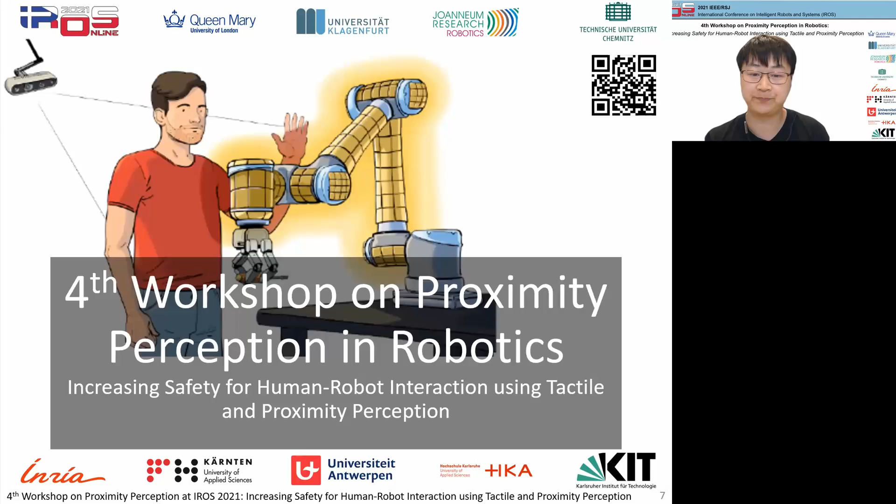Today we will host the last session of our workshop. This is the fourth workshop on proximity perception in robotics, and this year's topic is increasing safety for human-robot interaction using tactile and proximity perception. The idea this year is also to provide a bridging towards industry.

In our extra session we have 3 speakers, of which 2 are invited speakers and 1 is part of the PhD forum. First of all, today we have Dr. Peter Heiligensetzer from MRK-Systeme, then Francesca Palermo from Queen Mary University of London, and then Professor Rebecca Kramer-Bottiglio.

Today I'm happy to introduce our first speaker, Dr. Peter Heiligensetzer. He finished his PhD in robotics at Karlsruhe University, Karlsruhe Institute of Technology, about tactile and capacitive proximity sensors. He also worked at KUKA and later founded the company MRK-Systeme, which focuses on technologies regarding human-robot collaboration, as the name also says. MRK-Systeme offers many interesting and advanced solutions for industry applications with close human-robot interaction and physical contact with humans and robots, for example hand guidance based on force controls to increase the intuitiveness of the teaching processes.

They also offer a tactile and proximity sensing skin that covers the surface of industrial robots to enable human-robot interaction functionality. He's also founder of the company German Bionic Systems, which develops and produces exoskeletons for industry use cases. With that background and experience ranging from research all the way up to the deployment of industrial applications, we're very pleased to hear about your presentation. So Dr. Heiligensetzer, thanks for joining today, and you can now start your presentation.

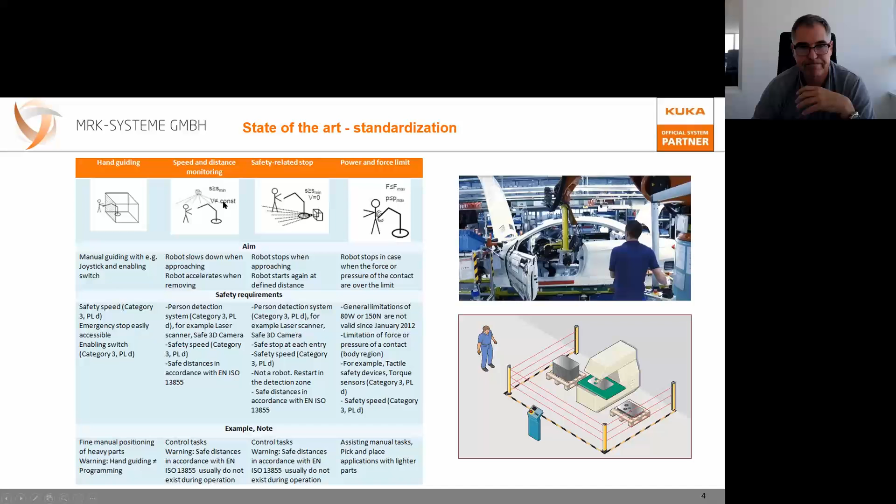Maybe also something from the real industrial world. There's the robot standard, ISO 10218, and it has two sections. One section defines the naked robot itself that you want to use.

In that part of the standard, it's defined that the collaborative robot should have safe brakes, axis limitation, reduced speed, and maybe force or pressure limitation. So these are the basic technologies the naked robot should provide.

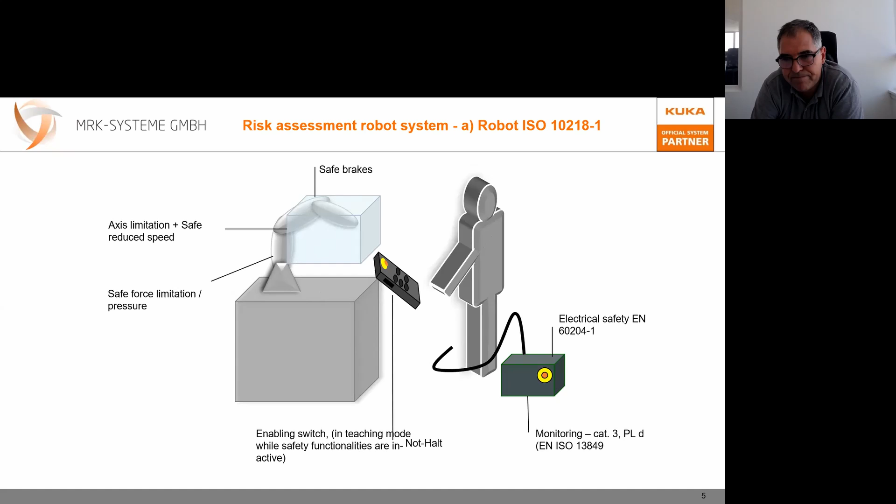That's one side. The other side, which I'd say is even more important, is a standard for system integrators defining the robot application. Because a robot cell is not safe on its own—an integrator or someone knowledgeable has to parameterize the robot.

For example, if the robot has the ability to reduce speed, someone should parameterize it correctly and also carry out testing and validation. Likewise for the criterion of power, force, or pressure limitations, somebody has to do the measurements. They have to follow a certain procedure, and it has to be recorded.

So there's a lot of work to be done around the robot. You cannot just put the robot on the table and let it run. You have to do quite a bit of parameterization work.

Then finally, at least in Europe, you put a CE mark on a type plate on the robot cell, and you give an EC declaration of conformity, where you declare that the machine is safe. This is an important step, and actually this is our core knowledge—using collaborative robots to make a safe robot cell out of them.

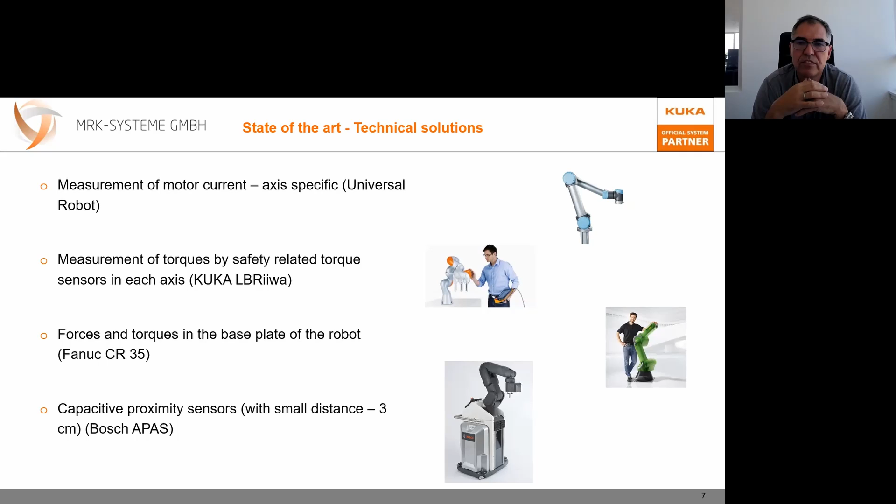So that's a rough overview about the collaborating robots.

When we started in this technology, we also used Universal Robot and others, but I'm still very much in favor of this proximity sensing, not to have physical contact, but to stop before a contact occurs.

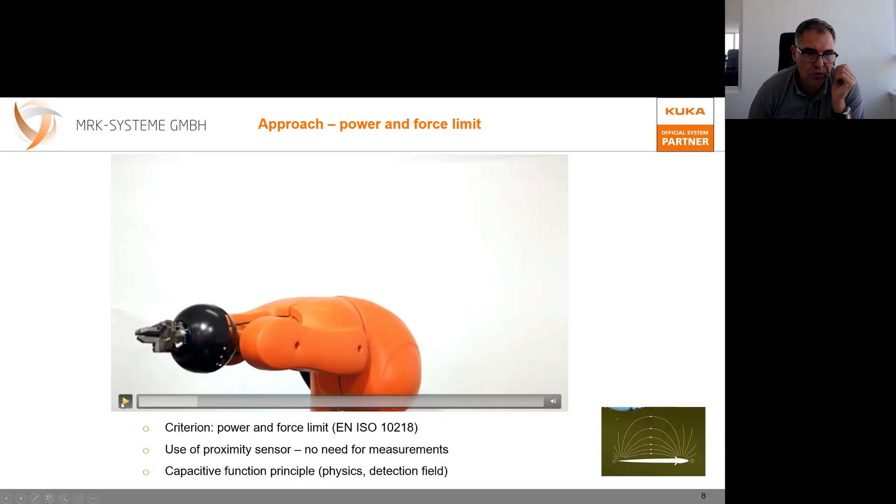So here's a short video in general of how it looks like. This is the robot, and it has sensors inside, and if somebody approaches, the robot gives a reaction and stops.

As mentioned before, in the standard ISO 10218, there are a couple of criteria that can be fulfilled to enable such safe human-robot collaboration. And even though we have proximity sensing, we still argue within this power and force limiting category. But just to be clear, we don't want to have any force at all. So we stop 1 millimeter before the actual contact, using the same argumentation and same criterion of the standard, but with no force and no problems in measurements.

So, some technical details about our measurement principle. Capacitive sensors are a fairly old technology. The background is it's a capacitor with, in general, 2 plates. The system we are using uses 3 plates: there's an excitation electrode, there's the ground, the surrounding ground, and they create an electrical field. We have an additional measuring electrode where we get the measuring signal from.

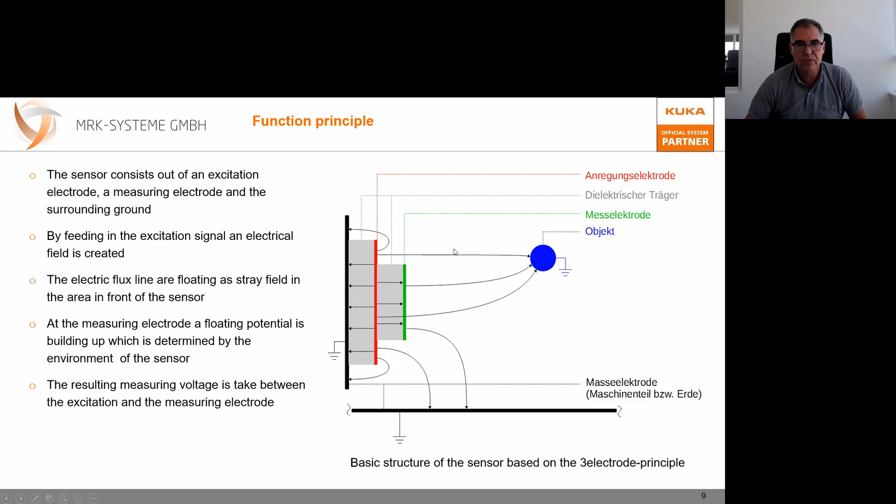So we define a threshold, and at this threshold we define that an approach is occurring. Since it's the real world and there's also ground close by, the basic sensor voltage is never zero—it settles at a certain value, and at the beginning of the measurement we take this as a reference, so our calculated values are just the difference from there.

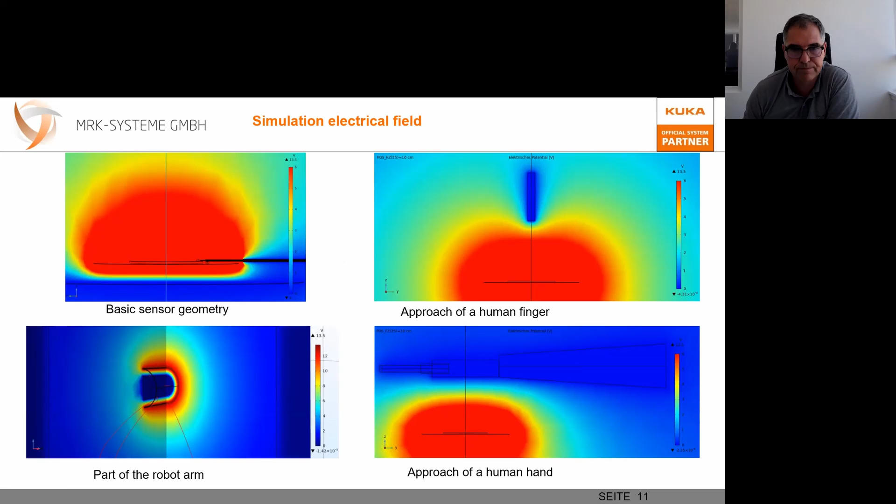So this basic technology we've been working on for a couple of years now. When coming to a product or using it for safety related issues, we put a lot of effort into optimizing the EMC characteristics.

Of course, by definition, a capacitive sensor creates a field and has some EMC behavior, but also in a certain range. There are standards defining in what frequency and strength EMC signals are allowed and what not. So in this band, we have to optimize our exciting electrode.

Also, we are using microcontrollers. Actually, we're using 2 microcontrollers that do a cross calculation and check each other to see if the calculations are still correct. And also, the creation of this excitation field is done by these microcontrollers.

What we also found out in our testing is that temperature is also a strong influence we have to take care of. So we make the whole circuit as temperature stable as possible, but we're also using an active compensation algorithm. We have sensors on our board and also on the electrodes, and a certain algorithm that compensates temperature-caused drifting effects.

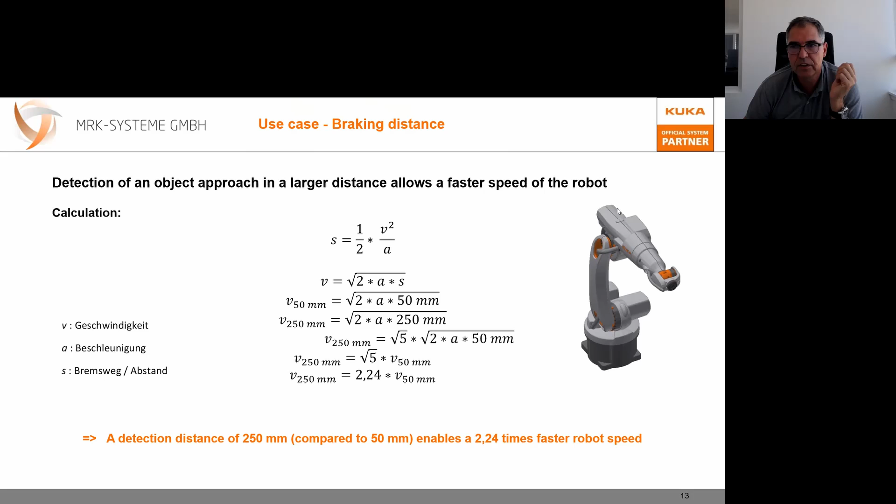So for real use cases, one example is at Audi—probably you know, a German car manufacturer, a nice one.

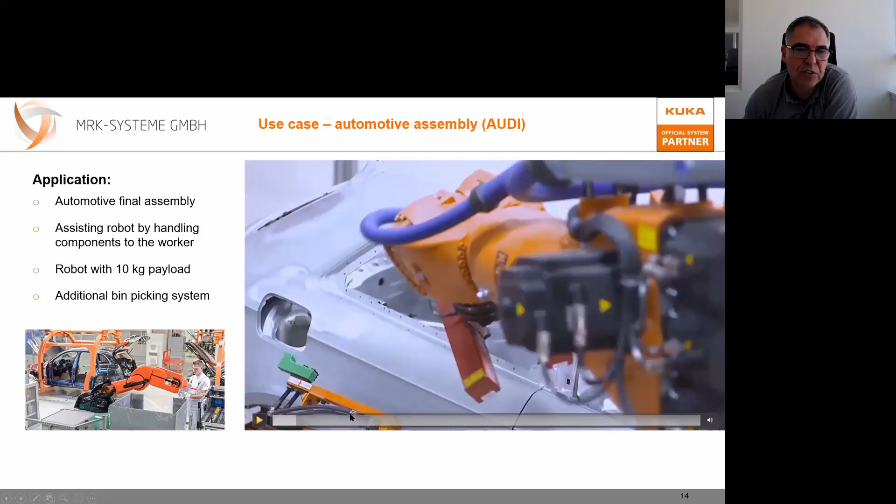Can you hear the sound? Yes, we can hear it. Okay, so yeah, probably I'll just leave it, unfortunately it's in German, but it's a nice movie, so I think you get the impression.

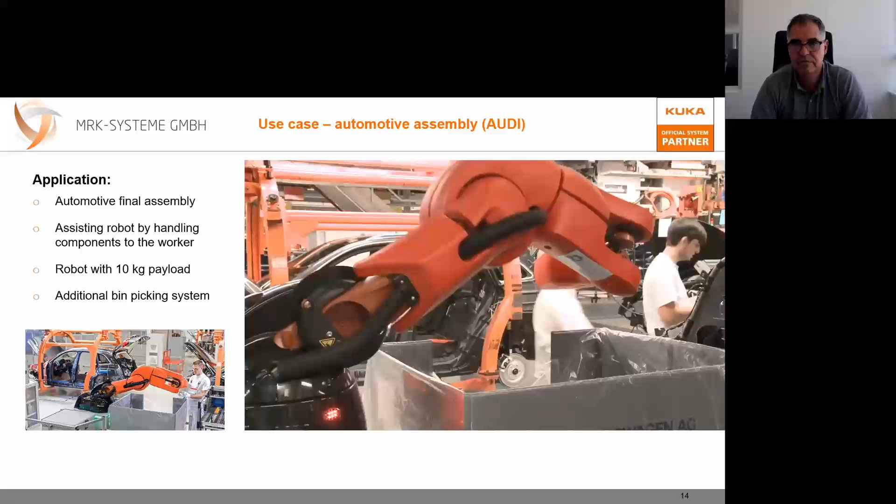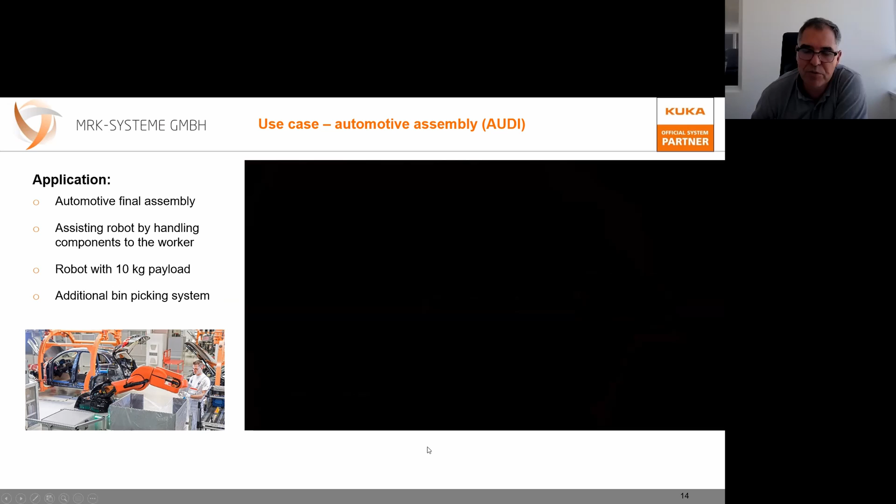Okay, so sorry, it was in German, but it was such a nice movie, and also with the speech of the Audi guys, if you could understand it, was very interesting.

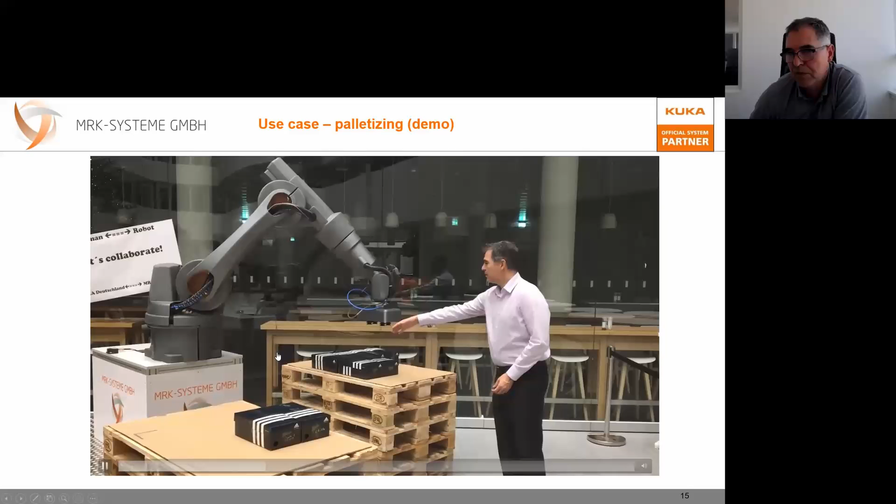So other applications, here we see we also use it for palletizing applications. There we also have in the tool area the sensor, also very nice, but this was not in a real application, this was in a demo application. In general, robots that are stopping before hitting something is, I would say, always interesting.

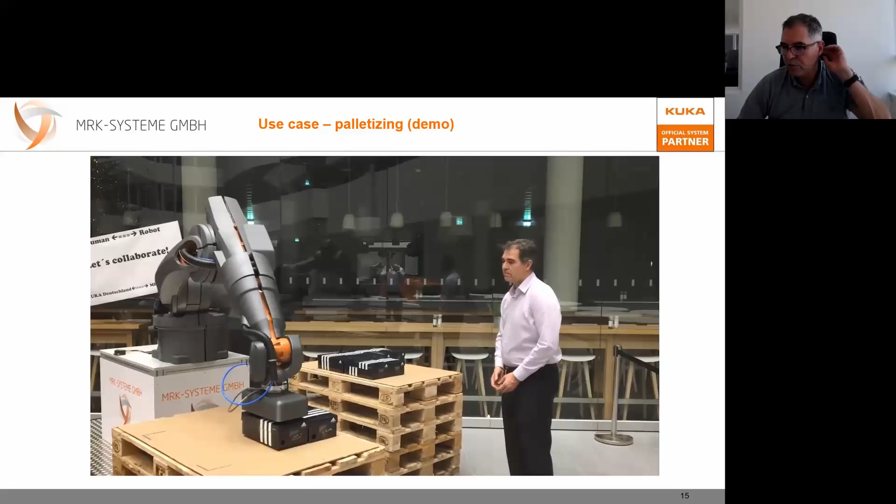Good, yeah, so coming slowly to an end of my presentation. Some summaries and some additional thoughts. In general, as I mentioned before, this human-robot collaboration with cobots, with power and force limitation and small robots, is a very interesting way of acting together with a robot, but it's not the only one.

So also speaking in the real world, if you have the possibility to use a laser scanner, then probably you should use it, because it's a stable technology. You don't have to do measurements with the collisions and so on, and it's very nice. But of course, this power and force limitation, as we have it with the other cobots, is very interesting because you can come close to the robot.

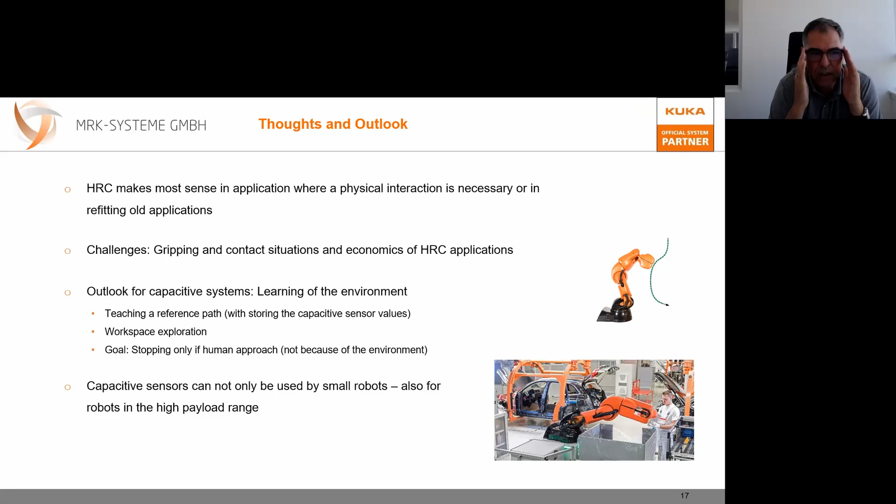Good. So some additional thoughts. Human-robot collaboration is not always the best choice. Even if it's my personal thing, if I see I could do an application without human-robot collaboration, just using fences, I would do so, because normally it's always easier and always cheaper. But there is a niche, and it makes sense when there's not much space, like automotive final assembly, or if you have to refit old applications where already humans are involved, then it makes perfect sense.

The challenges in this human-robot collaboration is always the gripping in the contact situation, because when you have the hand in between and the robot is coming, then this is always a problem. And also the economics, because standard robots are fairly cheap, and if you have to do a lot of engineering and a lot of thoughts about safety, the cost for such an application goes up, and then it might make no sense to use the robot anymore.

For the capacitive system, what is very nice, so the future could be that we also take into account the environment, because at the moment, if you have a dumb sensor, it cannot decide if there's a human standing, or if there's just a car standing, or something from the environment. But if you can learn the environment by teaching maybe a reference path, or you do a workspace exploration, then the sensor or the robot system can decide if it's human or if it belongs just to the environment, and then it makes it easier also for the tool area to have a protection.

Also, what is nice with the capacitive sensor, it's not only limited to small robots. For example, when thinking about the Fanuc CR35, because it's so big and so heavy, it has a certain stopping distance, it has to move so slow. But if such a robot can be equipped with proximity sensors, the speed might be higher. It might not be extremely high, but higher and reasonable for real applications. And so also this human-robot collaboration can be used for robots in a higher payload range.

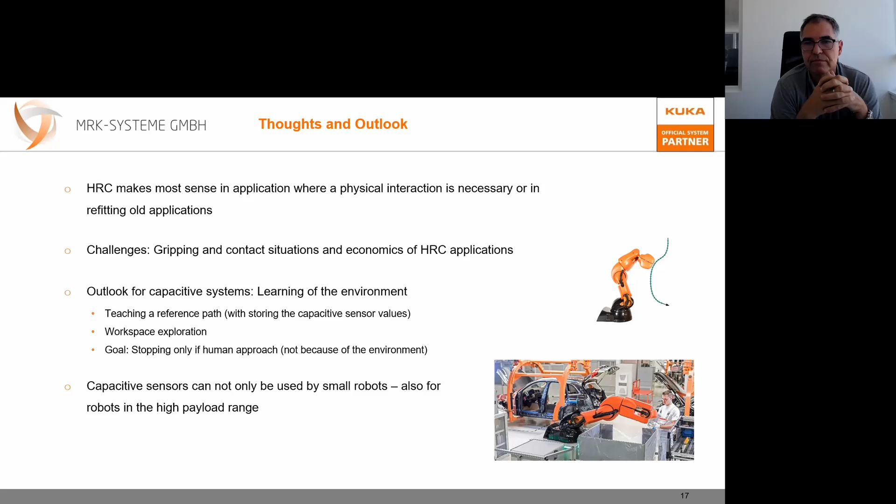Good. So far to my presentation. I hope you got something from it, and yeah, I'm ready for feedback or questions.

Right. Thank you very much. Thank you for a nice presentation, and also for giving us the insights on the development of the sensors and the certification process. So usually as a researcher, you usually just don't deal with safety certification or specifications, but at least not that intensively, and that's a nice

perspective for us. Does anybody have questions? Yes, Stefan? I have a question. Yeah, thank you, Peter, for your presentation. It's very interesting.

I wonder about the value proposition of this type of technology, and I'm curious also in making the difference between fenceless automation, meaning automation that's happening with robot sharing a common space with the human, but not necessarily interacting to solve a task, versus human-robot collaboration, where the task is solved by the robot and the human interacting. So I thought, is fenceless automation maybe a more attractive value proposition than the actual collaboration between human and the robot?

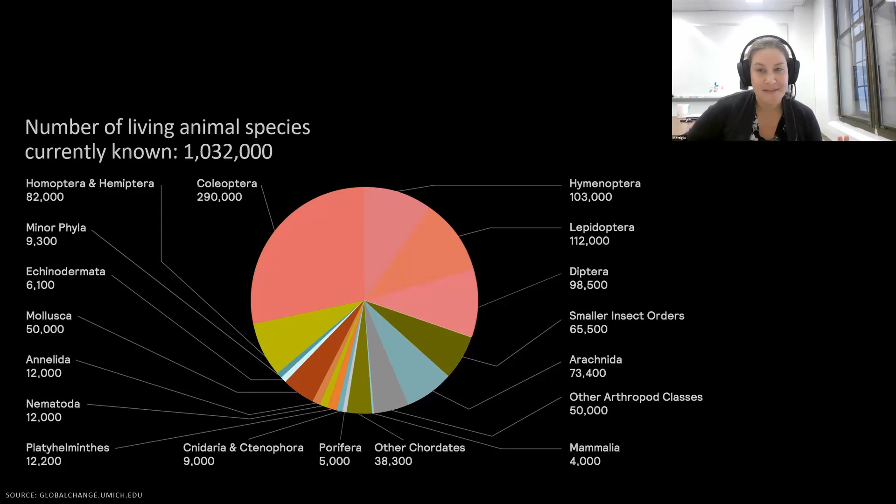Here's a plot of all the known animals in the world, just over 1 million at the time of this data. As it turns out, all known animals in the world are at least partially soft. There are no known animals that are completely rigid, which is in contrast to the way that we typically design machines and robots. And if you look even closer, over half of all animals known are completely soft. So there are some caveats here - completely soft animals need to be supported by their environment, so you think of jellyfish that live in the water or worms that live in the ground. We as humans are a fairly large animal, and we require our skeletal structure to keep us standing up on the ground, but even we are only 15% bone and 85% soft and fluid materials. So maybe there's something here - is it possible that our soft material composition actually plays a role in our ability to interact with and adapt to our environment?

This is a question that I am thinking about, and that many people are thinking about. Soft robotics in general, this approach of using soft materials in robots, is becoming really, really common in the academic community. There's many soft roboticists - it's a rapidly growing field, and there's many benefits to soft robots. So here's just a few soft robots that I think showcase these benefits very well.

But all of these robots, and most robots, are very task specific. They're designed to perform a very specific task, and they don't lend well to tasks outside of that designed use case. So locomoting robots often don't perform well as wearables or as grippers, and so on.

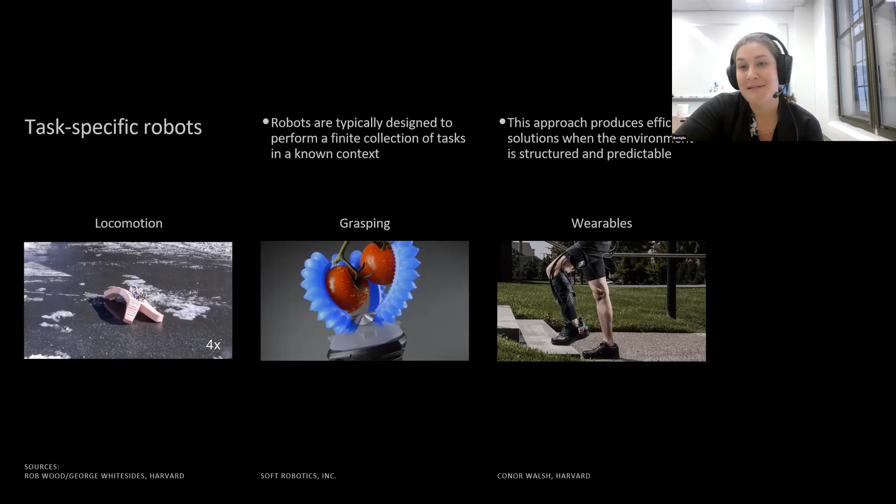And so this is the question that I'm really interested in. Can we design more adaptive robots? This is kind of the central focus of my group right now. We're working at the interface of materials, manufacturing, and robotics, trying to use new materials and incorporate them into robot constructs in order to achieve this new function of adaptive morphology and behavioral control policy.

So we have a few different adaptive robot platforms: robotic skins, robotic fabrics, a robot with morphing limbs for amphibious locomotion in two different environments. I won't talk about all of them today due to time limitations.

I will mention—I'm not going to talk about our robotic skins, but just so you know, following Peter's talk, he talked a lot about capacitive sensors, so we've also incorporated capacitive sensors for all of the reasons and benefits that he described. I think it's fitting that I omitted that from my talk today, but I'm going to focus on robotic fabrics and morphing limbs. So diving right in, we'll get into robotic fabrics.

Okay, what is a robotic fabric? I think definitions are always variable between people. Here, we describe a robotic fabric as simply a fabric that has been roboticized. Fabrics are incredibly ubiquitous—I'm wearing fabrics, my chair is fabric, my backpack is fabric, you are also probably wearing fabrics. They're just all around us. And the idea of actually roboticizing, or implementing some functionality into these inert, typically passive materials, is really appealing.

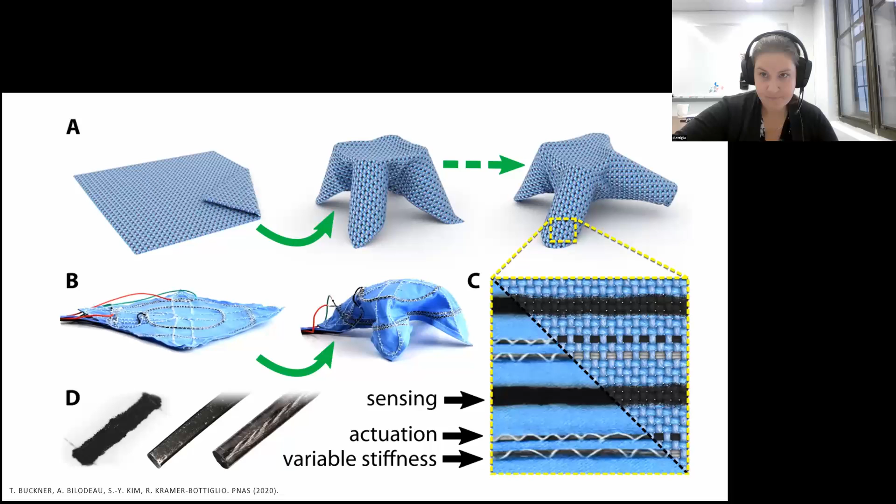So what we did is we created a suite of functional fibers to achieve actuation, sensing, and variable stiffness, and incorporated those into fabrics. I'll get into this suite of three different functional fibers in more detail, and I will focus on the sensing, given that this is a workshop on proximity sensing.

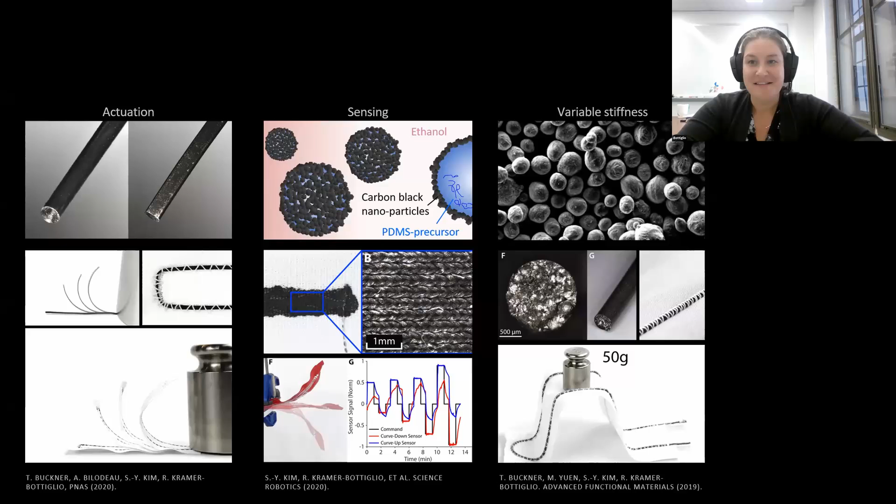Starting with the actuation, we use shape memory alloy—nitinol—typically made in round form, but we found that when we integrated antagonistic wire bending actuators into fabric, off-center forces can encourage the wire to twist rather than bend in its couching. Couching is what we use to attach it to the fabric, and this can cause chaotic actuation. We overcame this challenge by flattening the wire into these SMA nitinol ribbons as opposed to wires, which allows us to get this really clean bending actuation of the fabric.

Moving over to variable stiffness, we developed these variable stiffness fibers made from a composite of epoxy, which has a glass transition temperature—a thermoset epoxy—incorporated with Field's metal particles. Field's metal is an alloy of indium, bismuth, and tin, with a melting temperature around 62 degrees Celsius. This gives us a two-tiered softening effect.

When the material is cool, the epoxy is pretty rigid, with solid metal particles in it, so the whole thing takes on a very rigid composition. When we apply heat, the epoxy undergoes its glass transition temperature, softening by about an order of magnitude, but then the included metal particles also melt. So instead of rigid metal particles suspended, we have liquid particles suspended, and it undergoes an increased softening effect. We see almost a three order of magnitude change in stiffness between the cool state and the hot state.

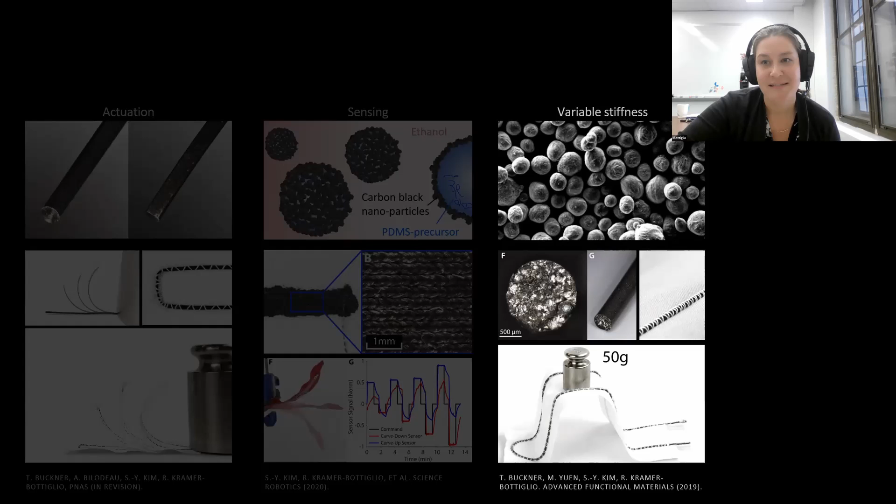And then finally, I will focus on the sensing element in our robotic fabrics. We developed this Pickering emulsion in order to incorporate sensing directly into textiles—this was a really clever idea put forward by one of my former postdocs, Dr.

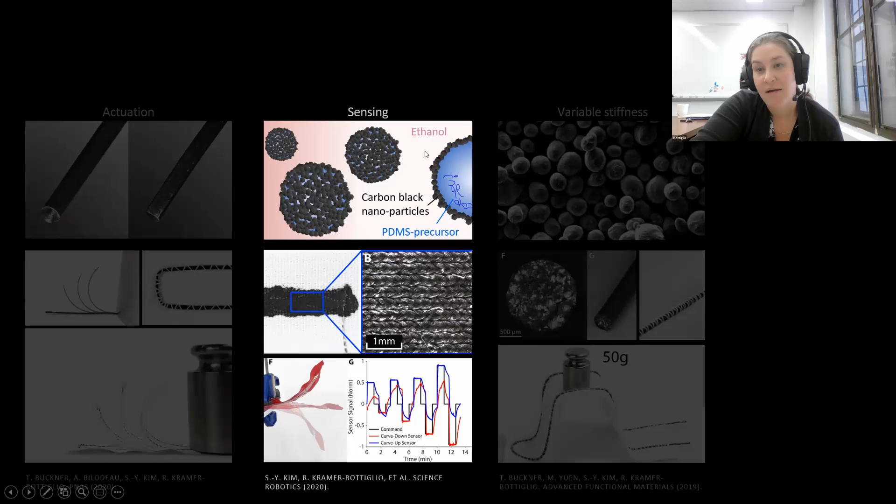Sang-Yup Kim's idea was to essentially take conductive composites and suspend them as an emulsion in a non-viscous carrier solvent. So what we have here in the schematic is a pre-cure silicone particle. This is PDMS, uncured, and it's stabilized by small carbon black nanoparticles on the surface. These are all suspended in ethanol, a very non-viscous, gentle solvent. When we deposit these on a surface, textile or non-textile, the ethanol evaporates away, and it allows these particles to start coalescing and self-assembling on the surface to create a conductive composite that can perform as either a resistive strain sensor or an electrode to a capacitive strain sensor.

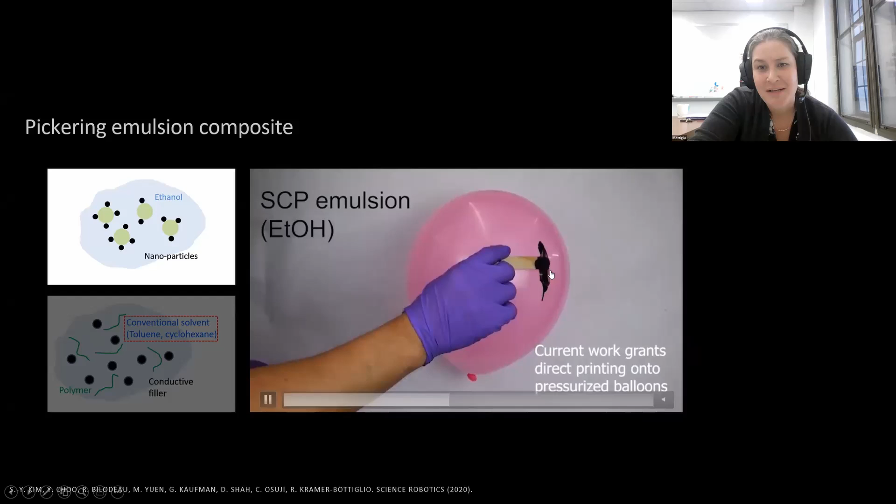So we can start to do some interesting things with these, looking at printing them onto substrates. Here you can see again we have these conductive composite particles suspended in ethanol. It's very gentle. We're putting it onto a balloon here, just kind of pasting it on. I'll pause this for a second just to focus on the stability and the printability of the ink.

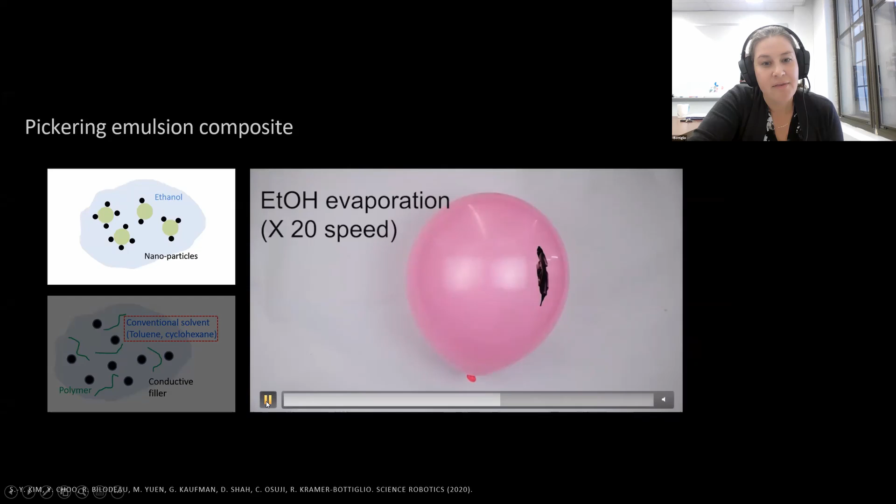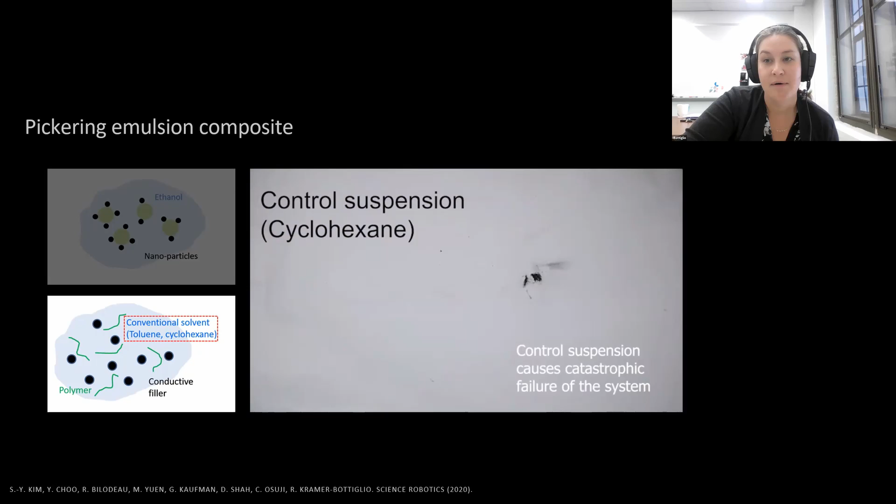And we contrast that with a typical conductive composite, which usually needs to be thinned. You would have a conductive composite and need to thin it out in order to print it, usually with a toxic solvent like cyclohexane or toluene. And then as you can see, when you put that onto a substrate, it will cause damage. So that can be challenging for wearability, putting it onto fabrics or any kind of elastomer or latex substrate.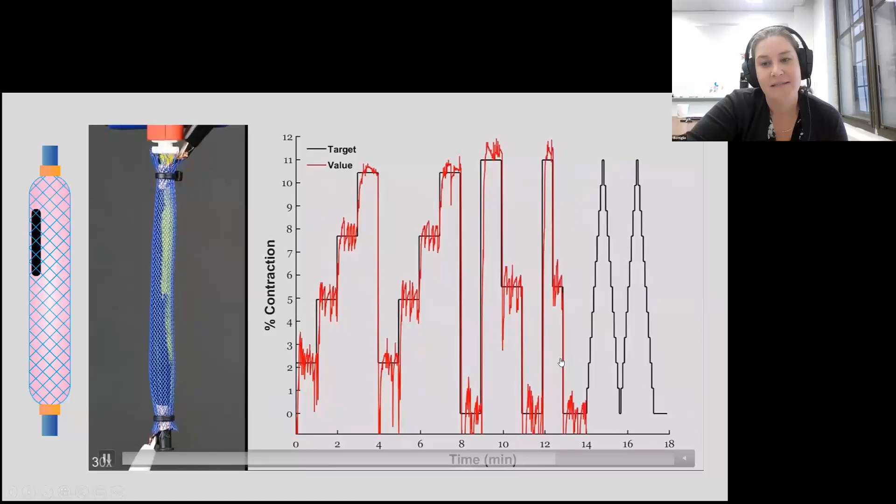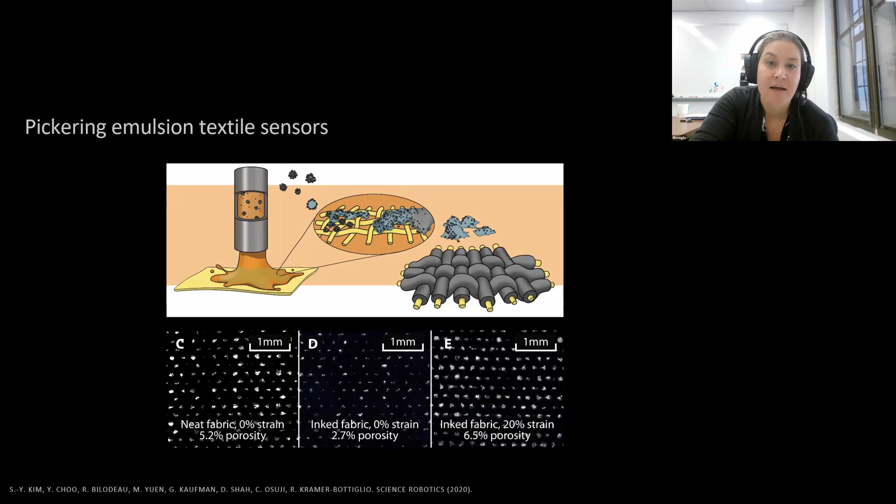Of special interest to robotic fabrics, as it turns out, we weren't quite expecting this, but when we print this onto a fabric substrate, the conductive composite self-assembles around the individual fibers as opposed to filling the gaps between them, which is what we would typically see with a more viscous or thin conductive composite. So we print this onto standard fabrics like cotton or muslin or nylon, and we can see this is the neat fabric backlit, with about 5% porosity. When we print our Pickering emulsion sensor onto it, we retain a lot of that porosity, about almost 3% porosity. And in the strained case we increase that porosity further. This is really important for retaining the properties of the fabric. If we want to use these, especially for wearables, we want to retain that porosity and breathability for comfort.

Here we painted the Pickering emulsion sensor onto kinesiology tape. This is a standard fabric tape that's used to usually support athletes without restricting their motions. And you can see the raw sensor data coming out of the sensor.

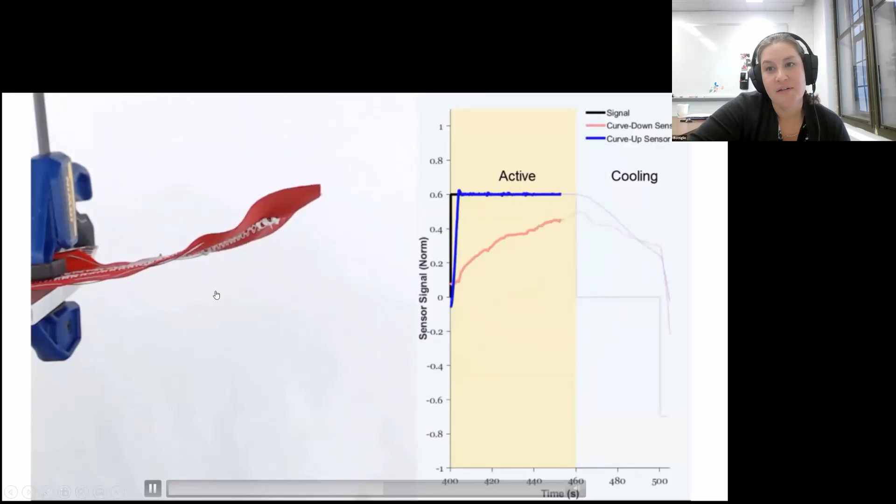And here the sensors are placed into a fully robotic fabric. We have our shape memory alloy ribbons incorporated into the fabric, and the fabric is being commanded to simply bend up and bend down. We have sensors, the Pickering emulsion sensors, printed onto the top side and the bottom side of the fabric, and they're being used to actually control that upward and downward motion. Although you can see it's a little bit jumpy.

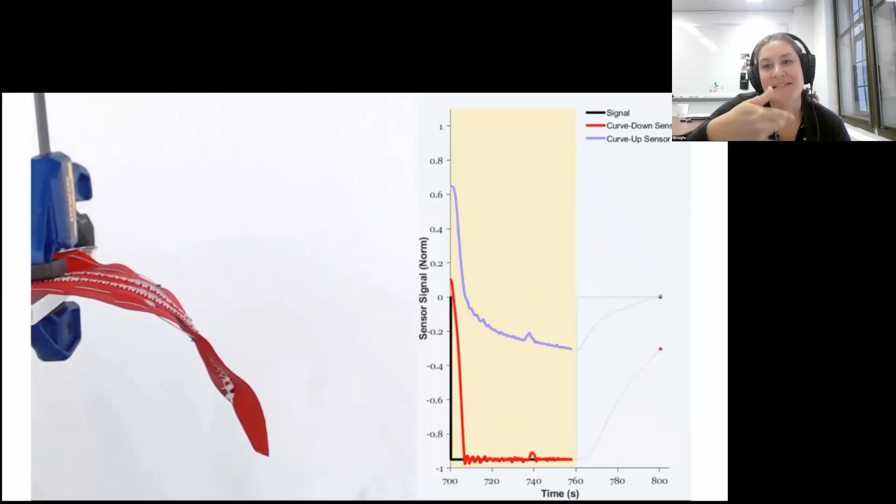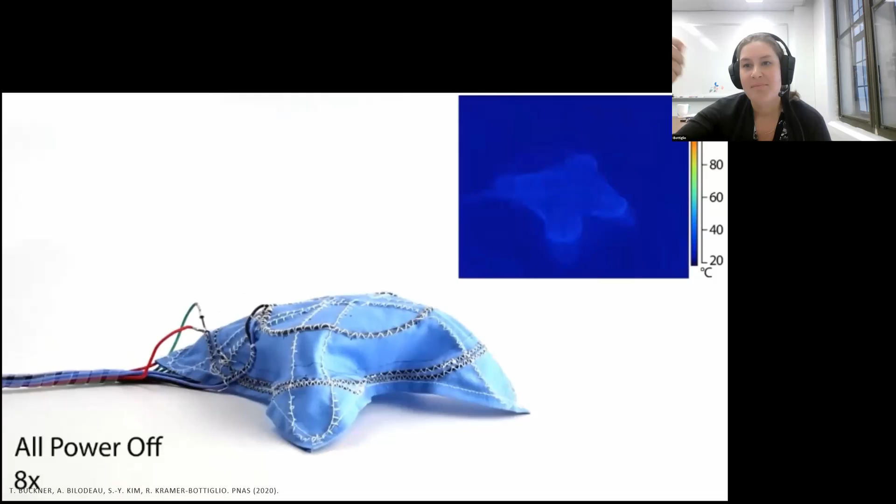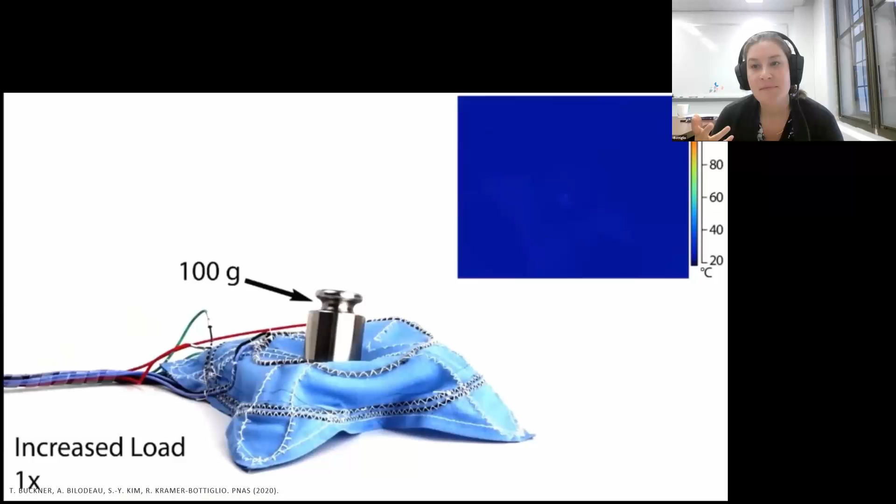So here are some full robotic fabric demonstrations, showing the shape-changing behavior and potentials for robotic fabrics. In this case, the fabric starts out in this flat configuration. It softens its variable stiffness frame and then uses its actuators to stand up into kind of a table-like structure. And then we place weights on top of the structure. In a moment, you'll see that we soften it again and the whole thing settles back down into its initial flat configuration. So I think this demonstration shows how we could potentially use these for self-deploying structures, things like deploying tents, and load-bearing systems. And we're working on the system now to make it actually dynamic into a walker that can carry loads.

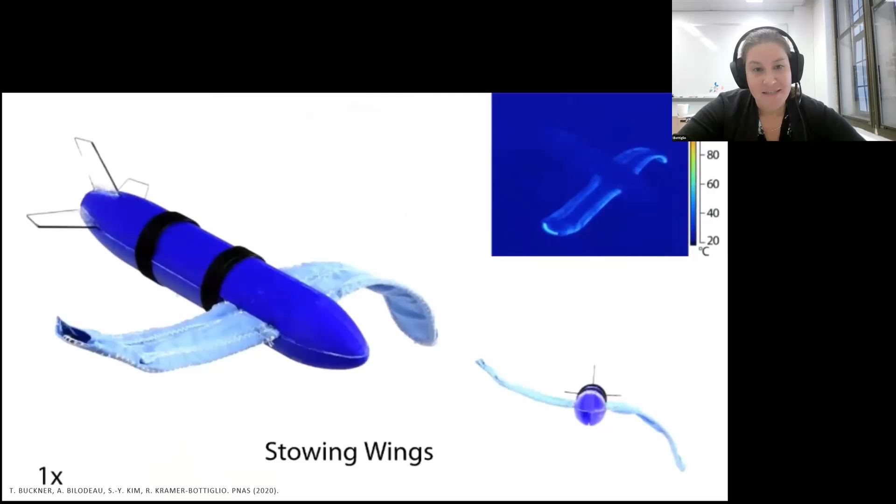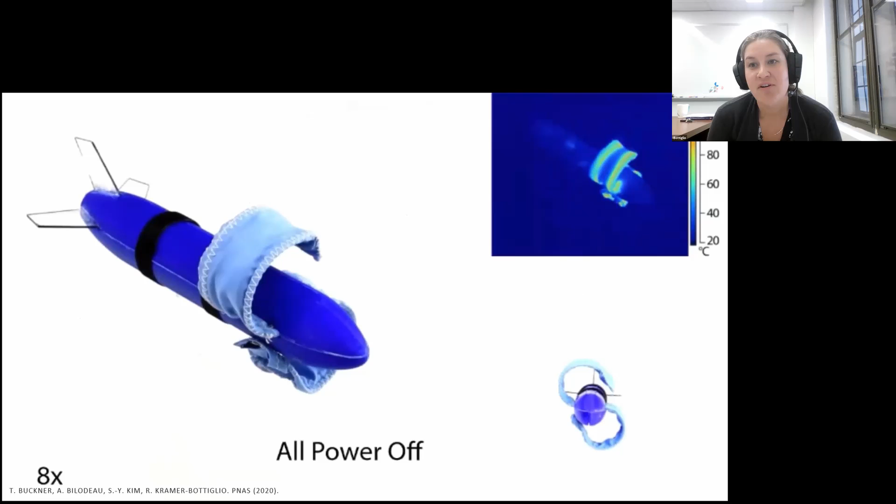Here's another demonstration of the robotic fabrics in action. We had these wings that are rigid initially. We soften the variable stiffness fibers, and the wings curl around the fuselage to take up very low volume during storage and transport.

They can then self-deploy and become rigid and load-bearing again to perform as a flyer. We don't actually show this flying, however the system is fully untethered. All the electronics, controllers, and batteries are inside the fuselage, so it's a fully untethered demonstration.

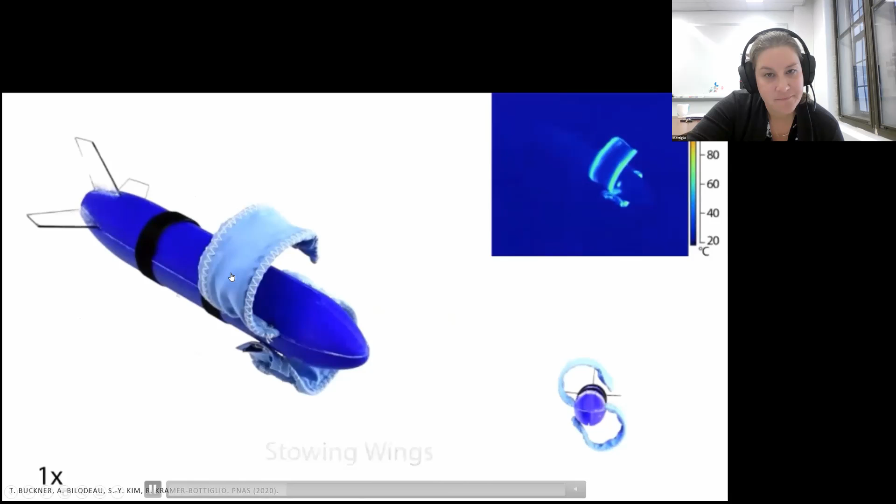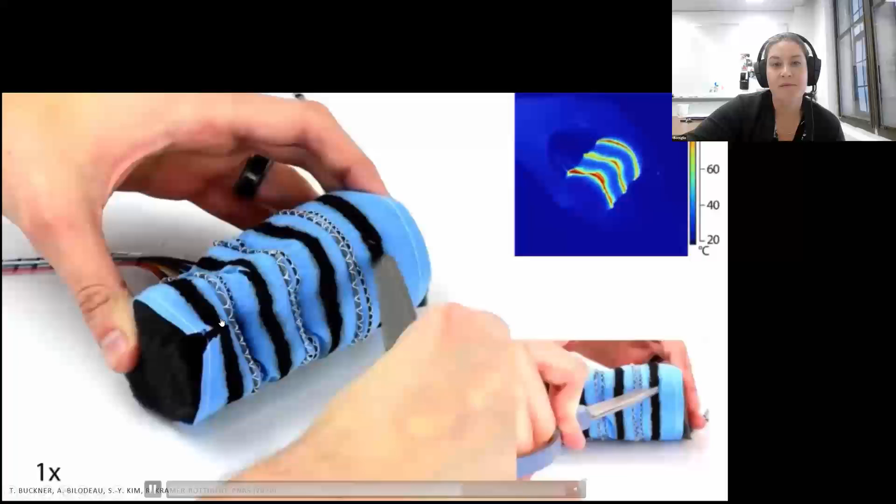Finally, to showcase potential wearability of robotic fabrics and the utility of the sensors, we have this reactive robotic tourniquet demonstration. This emulates the idea of damage: upon injury, the sensor might be cut, and the broken sensor triggers a reaction.

The variable stiffness fibers soften again, and the actuators compress to apply constrained blood flow through the limb, simulated here by this foam. Then the variable stiffness fibers become rigid again to hold that compressed position without any additional power supply.

I'm going to switch topics now away from robotic fabrics and the Pickering emulsion-based printable sensors, and talk about one more adaptive platform we're working on, which is a morphing limb platform for amphibious locomotion.

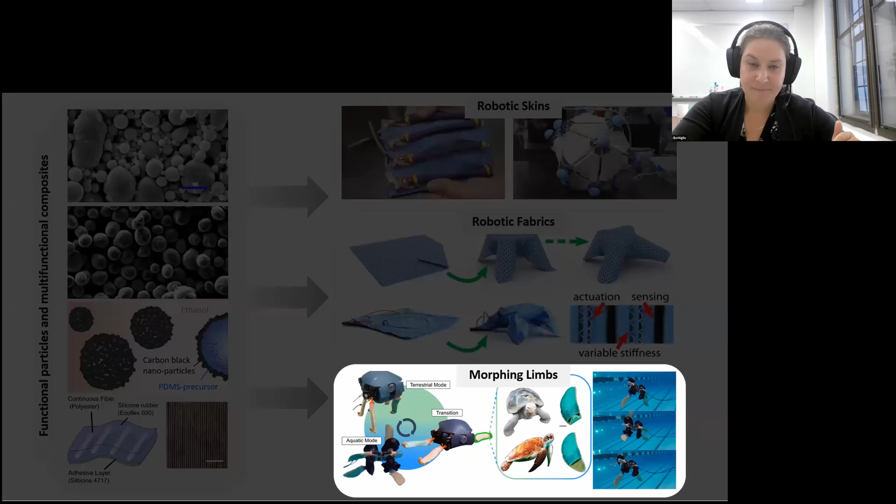The basic idea is we took inspiration from two morphologically similar animals, sea turtles and land tortoises, which share this common hull morphology but differ primarily in their limbs. Land tortoises have a rounded limb better for load bearing, while sea turtles have a flattened flipper better for hydrodynamic efficiency in water.

So we developed this soft robotic morphing limb. It uses similar materials and technology to the robotic fabrics we just saw, with fluidic actuators coupled to a thermoset epoxy. It starts initially in a neutral flipper configuration. You can see copper laser-cut heaters here. We apply heat, which softens the epoxy and makes the whole thing very soft.

We use our fluidic actuators to morph the limb into this rounded load-bearing configuration, and you can see the bottom of the limb curls forward to create a foot. Then we cool the whole system to lock the new shape in place, allowing us to transition between something that looks more like a flipper for swimming and more like a leg for walking on land.

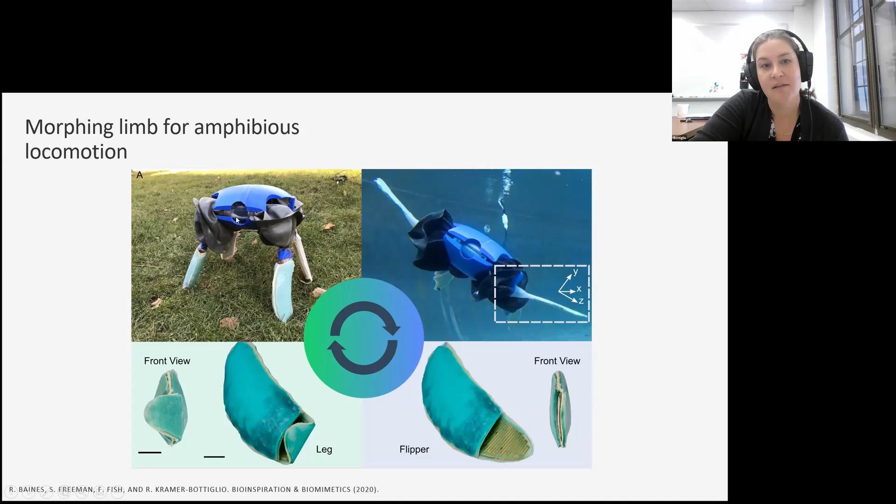We can see the robot doing these things, swimming in water first. To be clear, this is not our actual robot, this is a sea turtle, shown here to highlight the similarities between our robot's behavior and the real animal. These three videos showcase our real robot performing maneuvers such as submerged lift and diving, and surface swimming using different gaits.

Now if we flip over to leg mode, we can see how the robot behaves on land. This is a more challenging environment, a little less stable since we don't have support from the water anymore. Here you see our animal inspiration, the land tortoise walking towards us, and our robot using a similar creeping gait, a very stable gait where three legs are always in contact with the ground.

It's tested on different substrates here: walking on our lab tiled floor, and walking on a more representative transition substrate of water, sand, and pebbles.

We explored one further gait for this robot. Looking at our inspiration animal again, here we have sea turtles crawling up the beach, showing the amphibious behaviors of sea turtles and how they transition from water to land. They use what we like to call a beach crawl, and we implemented a similar gait in our robot to show crawling on sand, and again on the transition substrate of sand, pebbles, and water.

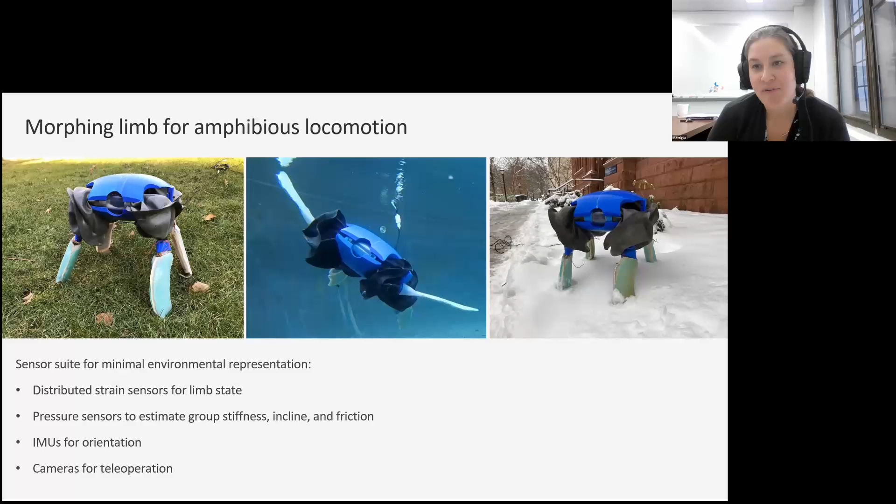So I hope this can spur some discussion about how sensing in general and proximity sensing might enable further development of this robot. So I will end there. I want to thank my group and also thank you for your attention.

Yes, thank you. All right.

First question from Kaspar. Yeah, hi Rebecca. Very nice presentation. Really, I like in particular the turtle robot, or should I say, is it a tortoise robot? It's always very confusing. Turtle and tortoise inspired. Yeah, both. Both. That's the answer, exactly.

Anyway, I just wanted to see whether you could comment on the speed of your sensors and your actuators, and I'm asking in particular because some of the actuators use shape memory alloys, and they are known to be a bit slow because you need to heat things up and then cool it down again. So how do your sensors perform in regards to time, speed?

Yeah, that's a great question. So are you specifically asking about the Pickering emulsion resistive sensors, or just sensors in general? The sensors you are using. I mean, maybe they are fine for the slightly slower moving systems, or whenever you have, for example, the folding plane-like structure, there I suppose it takes some time for the folding to take place and the sensing might be adequate. But maybe your sensors can be also used at higher speeds.

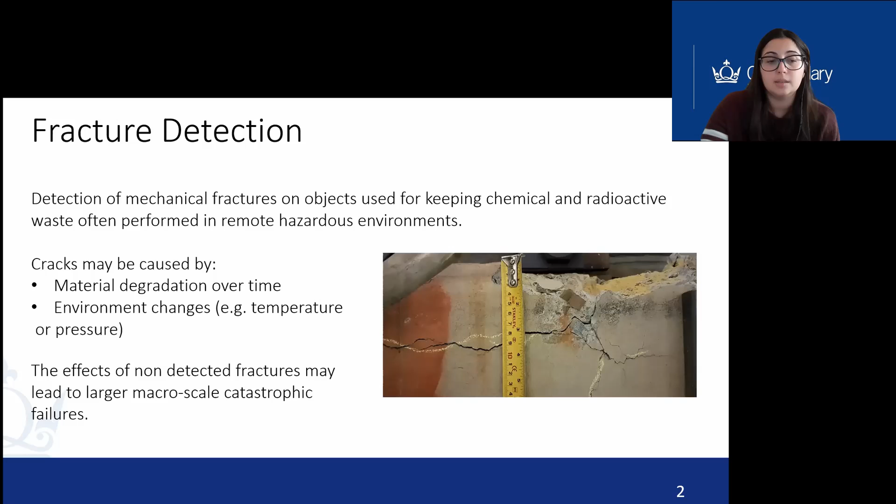One of the most important tasks in extreme environments is the detection of fracture and cracks on objects used, for example, for keeping chemical radioactive waste. These cracks may be caused by different reasons, such as material degradation over time or environmental changes. The problem is that if these cracks are not detected in time, they may lead to larger macro-scale catastrophic failures. Currently, in the state of the art, there are multiple methods for detecting cracks, mainly based on computer vision.

The problem is that computer vision is not applicable in extreme environments because the electronic components get degraded by gamma radiation. And acousto-electric sensors actually require being embedded when building the structure. On the other hand, tactile and proximity sensing can provide information on material properties that computer vision may not be able to do, such as texture, hardness, and the stiffness of the explored object.

In my research, I'm using a tactile fiber optic based proximity sensor developed at Queen Mary University of London by Jelizaveta Konstantinova. This sensor is finger-shaped and consists of 4 pairs of fiber optics: 3 positioned in the middle used for calculating the deformation of the soft part of the sensor, and a pair positioned at the tip of the finger used to calculate the proximity of the explored surface.

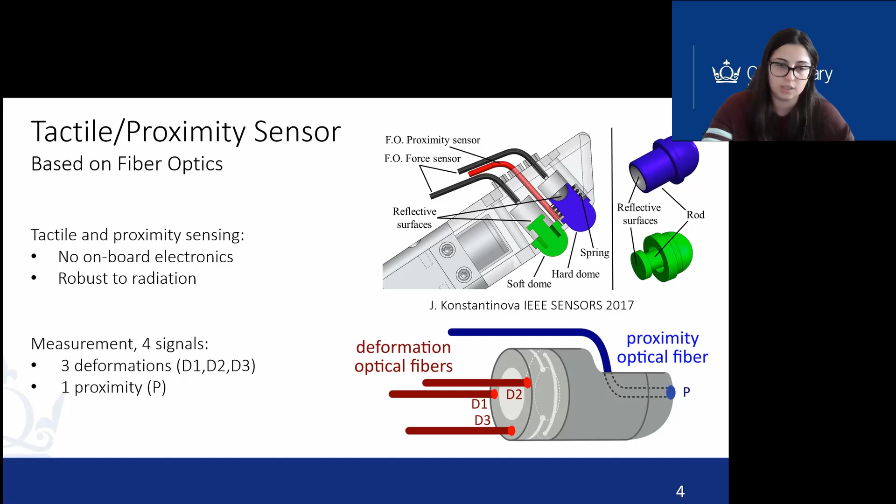The pro of using tactile proximity sensing, and in this case fiber optic, is that it doesn't have any onboard electronics, and in addition is robust to the gamma radiation found in extreme and nuclear environments.

In the past, I developed a classifier based on force proximity data for the classification and analysis of explored surfaces. This classifier was able to recognize if there was indeed a crack in the explored surface and the width of the crack, using a random forest classifier and time domain features such as mean absolute value and root mean square.

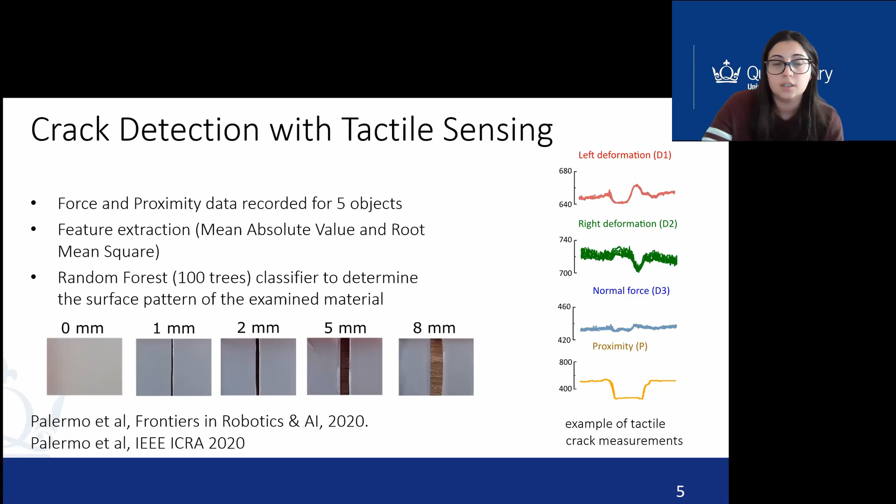The problem with this kind of tactile-only based approach is that it's really time consuming. For exploring only a small surface of like 10 centimeters by 20 centimeters, it was requiring around 10 to 15 minutes. So if you think about applying this kind of model in an unconstrained and real unsupervised environment, it will take a lot of time and may produce many errors.

So the idea is to implement a multimodal approach. Using object detection extracted from video and images captured by a camera, we can apply object detection with a Faster R-CNN on top of it.

Once the camera scans a surface, it can recognize and narrow down the possible interesting locations and send its coordinates to a robotic manipulator, which has the sensor I previously described attached as an end effector. The manipulator, once it receives the coordinates, can reposition itself and start the exploration, and at the same time an online classifier can confirm if there is a crack or if it's just a false positive from vision.

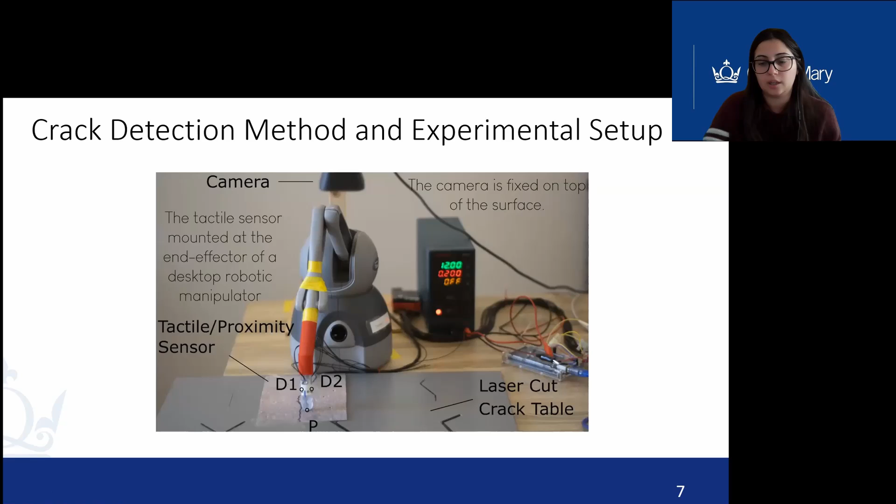The object detection was performed with a Faster R-CNN with Inception V2 architecture, pre-trained on a COCO dataset. I trained, tested, and validated the model on top of 3,000 images, all manually labeled with the LabelImg software, and split the dataset into 70% for training and 30% for testing and validation.

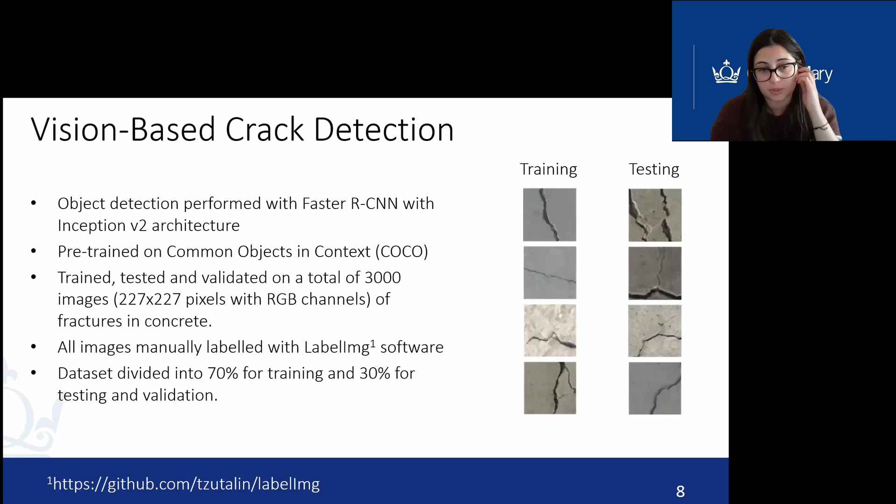The problem with this dataset is that the majority of the images were just showing the fracture without any other object inside the picture and no occlusion. So I had to perform a set of augmentations to improve the robustness of the object detection network.

First, I decided to add a sort of background to these images, randomly pasting patches onto possible scenarios that you may find in nuclear extreme environments. The problem is that since I didn't have PNGs for the images, only JPEGs, I had to paste the whole patch.

The problem in this case is that the network may base the object detection for the crack just on the gray squared patch. So to overcome this, I also randomly pasted gray flat surface patches to improve the robustness of the model. In addition, I created occlusion by randomly pasting objects on top of the crack.

In this case, I'm showing screws because they are one of the possible objects that may be found in extreme nuclear power plants. And then a random set of augmentations: horizontal flip, scale, translate, rotate, and shear.

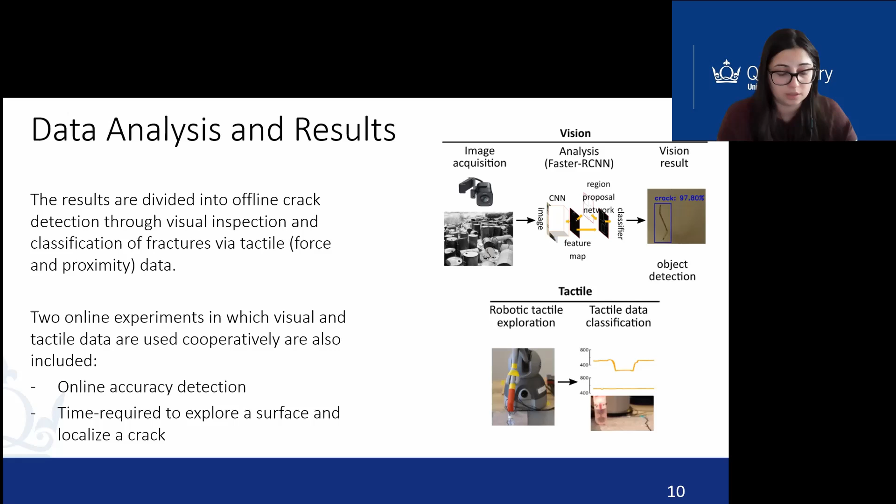The second one is to investigate the time required to explore a surface and localize a crack. As I said before, the main problem of the tactile-only approach was the time required to explore a surface. The model trained with augmented images outperformed the baseline model, which was trained without any augmentation.

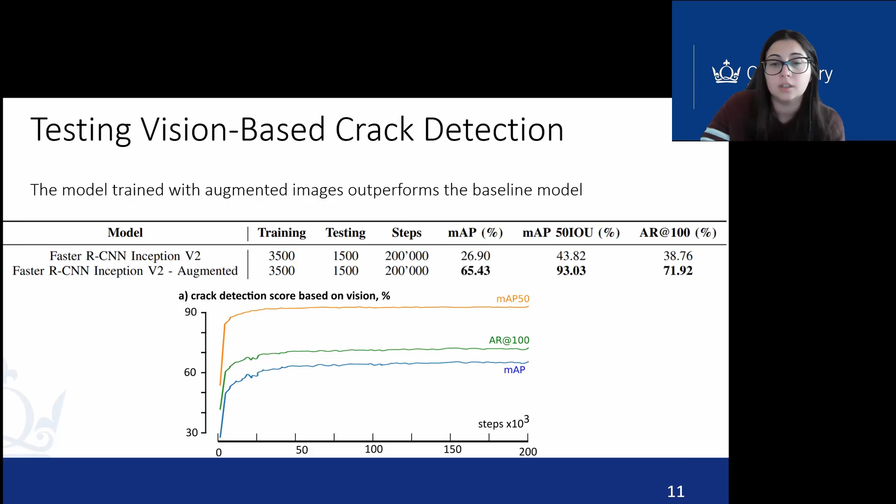The mean average precision achieves around 65% accuracy. Regarding the tactile algorithm, the random forest model achieves the best results when trained and tested with the deformation data and the proximity data, achieving around 90% accuracy.

Here you can see an example of the online accuracy detection. The camera scans the environment, recognizes the possible fracture position, and sends the coordinates, the region of interest, to the manipulator, which will position and start the exploration.

In this case, you can see that the first crack was indeed considered a crack, while the second one, since it is a paper printed crack, was not considered a crack, but was indeed a false positive from vision.

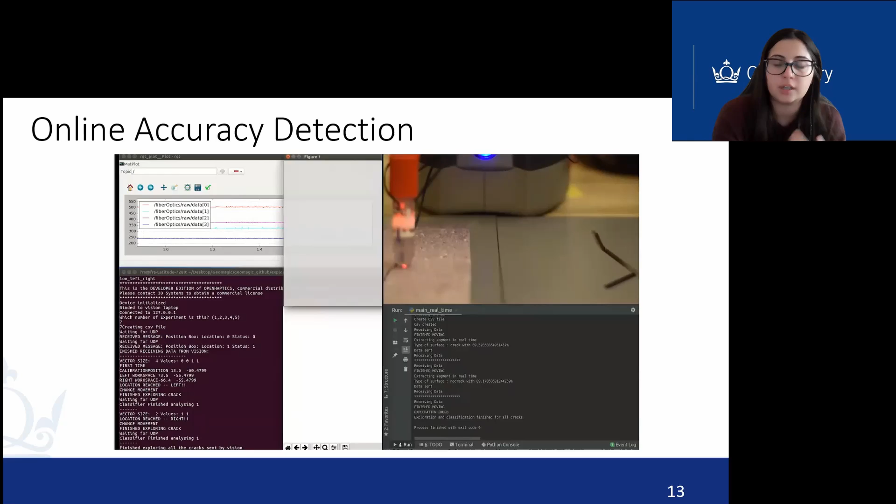Regarding the online accuracy detection, I performed 10 trials. In these 10 trials, vision detected 7 false positives, which were paper printed cracks, and 1 false negative, so the crack was not detected, and 7 detected cracks. The tactile system, on the other side, received 14 possible crack locations and failed only 1 case, which was a 0.5 millimeter crack.

I used false positive paper printed cracks in this case because in an unstructured, unsupervised environment, you may find some design that may be similar to a crack but is not actually a crack, like some markers on the wall or something similar.

The main problem with this approach is the false negatives. Whenever a crack is never detected, then that location will never be explored. This is something that needs to be investigated, and the model needs to be made robust against false negatives.

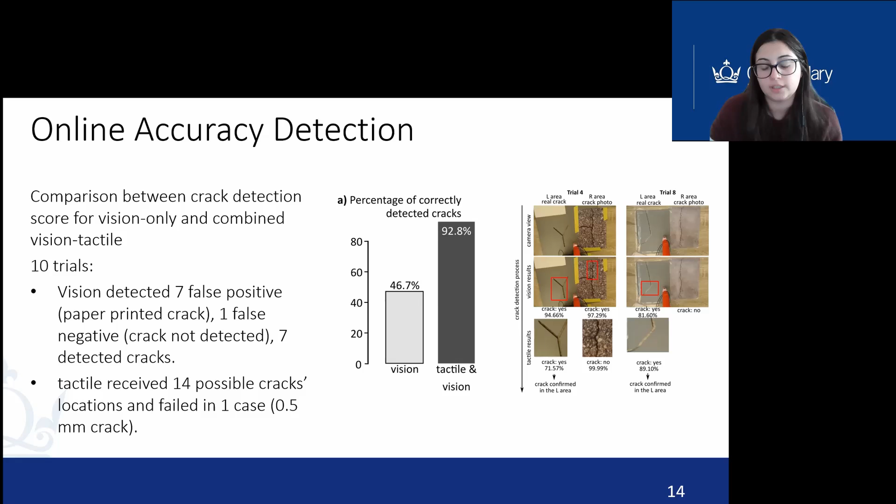Regarding task completion time, the time required to explore a surface and localize a crack, I investigated and compared tactile-only versus tactile and vision together. For tactile-only, the number of scanning movements was estimated based on the average crack geometry of the previously described datasets and their spatial frequency.

You can see that using a combination of tactile and vision to detect the fracture requires much less time than using only tactile data. Using only tactile was requiring on average 330 seconds, while using the multimodal approach required around 50 seconds, so around 1 minute.

This is for the multimodal approach, but once we have these images extracted from the object detection, we can further analyze them, for example to extract the crack geometry and calculate an optimal path for the tactile exploration. Applying image processing and computer vision techniques, we can find the location of the crack branches and nodes.

For my analysis, I first apply edge detection, then contour extraction. I remove the outliers of the contours, and from the final image I create a mask. Once I have this mask, I extract the skeleton, which needs to be pruned because there may be small external outliers.

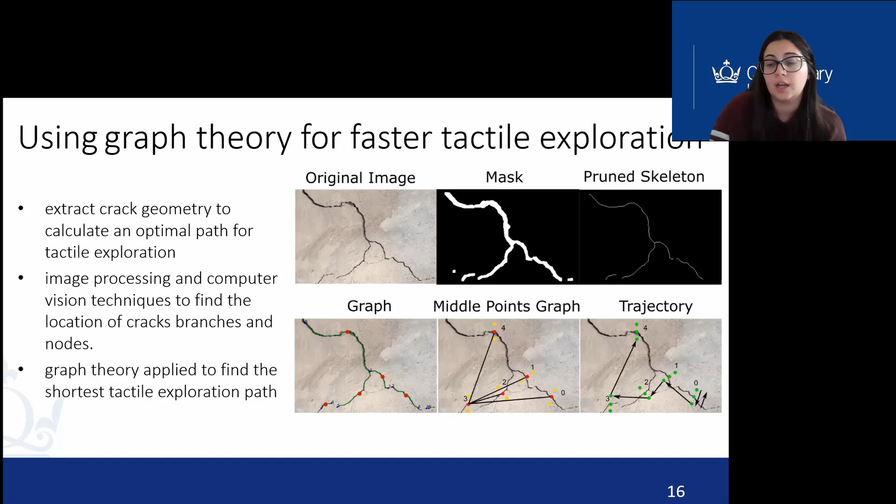From each edge I calculate the middle point, and this middle point becomes my next node, then I fully connect all the nodes together. Once I have this middle point graph, I can apply a minimum spanning tree to create a trajectory for the manipulator, so each node of the graph is explored only once, and the minimum path from the starting node is found and explored.

The experiments were performed on 25 fractures. With the experiment performed on 25 fractures, it was found that the time to explore the fracture images was reduced by 12 times using graph theory.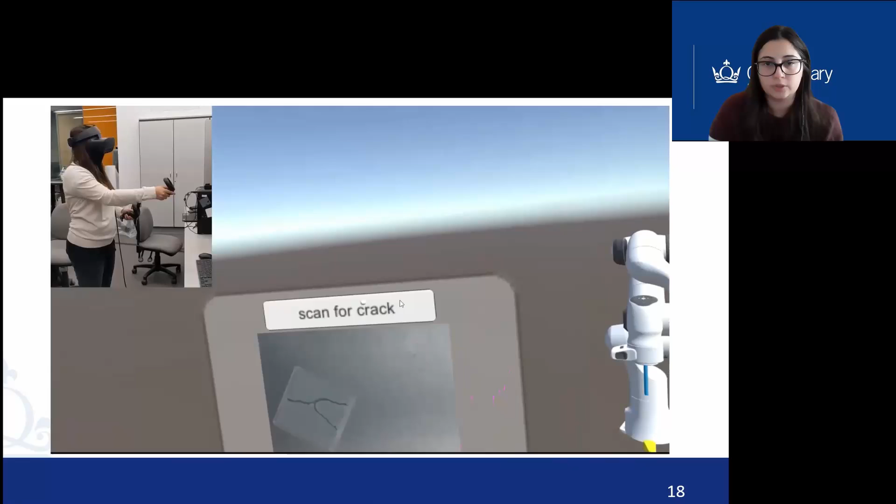The operator sees the camera vision and then approves the scanning of the crack. Then these images are sent to the object detection and then to the image processing analysis, which extracts in the end the motion planning for the robot.

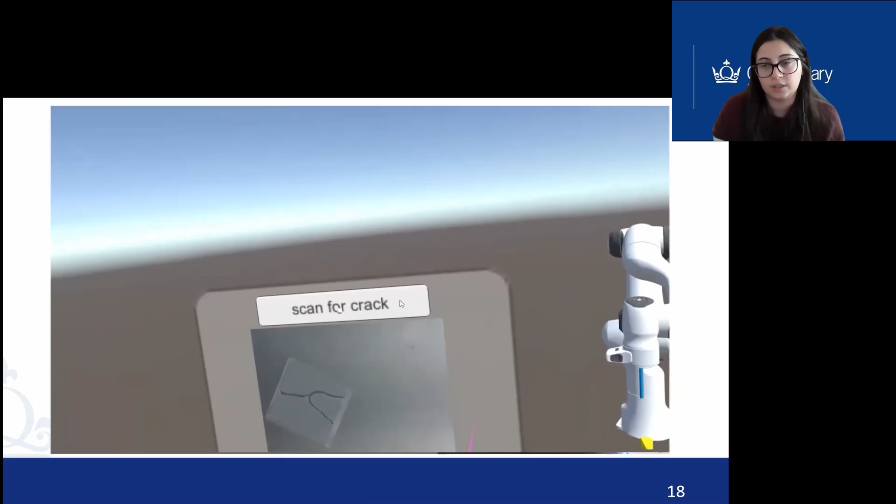So the robot will start the exploration by following the trajectory. In addition, an online classifier will be added for real-time classification at all the midpoint exploration of the graph.

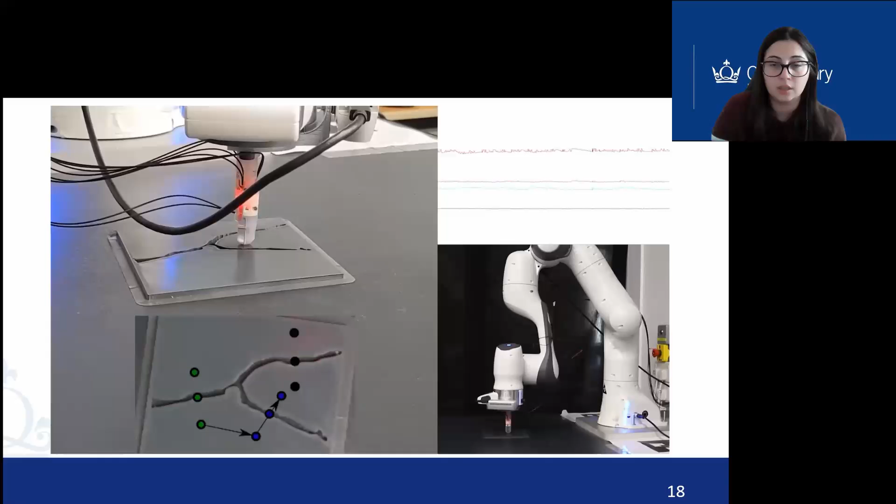In conclusion, I presented a multimodal approach with visual and tactile features for crack localization and recognition, and in addition, edge detection and graph theory for the motion planning trajectory.

In future research, I will also develop a teleoperated model with an operator to start the analysis and exploration of the crack, and also virtual reality visual reconstruction of the explored fracture to be sent to the operator for inspection. Thank you so much for your attention.

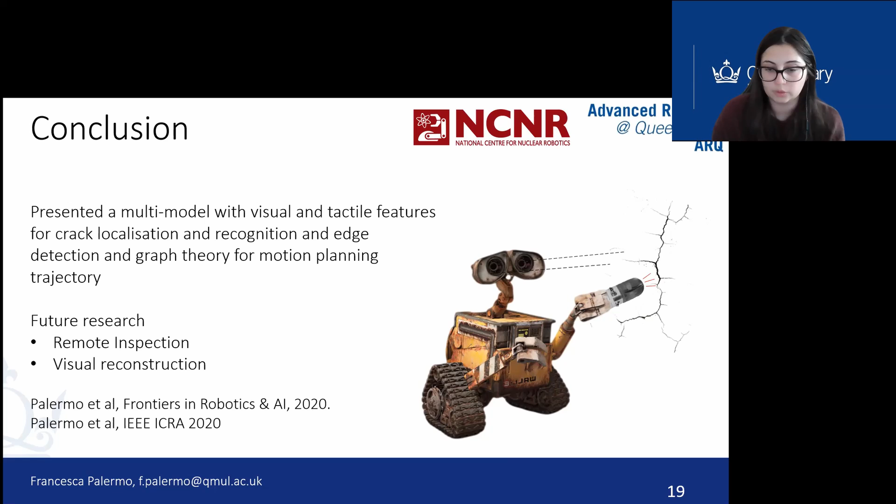Thanks a lot, Francesca. Fantastic presentation. Well done. Yeah, I was forgetting English sometimes. Oh, okay, well, no problem, go on. Anyway, thanks for that. Any questions from anyone?

Annabelle asks: I was curious about the false negative cases, because you showed that you were augmenting the dataset of images and you had occlusion, right? You had screws on top of the crack. So I was wondering, is that what happens with false negatives? What happens if there's an occlusion - does the camera then detect the screws and the crack underneath? And if yes, what happens if the robot has to go to the crack to perform tactile inspection, but there are parts in it?

That actually I haven't investigated. I tried the model with occlusion, and it was indeed recognizing the crack underneath. But when we did the experiment with the robot, we didn't consider any occlusion - we just positioned the camera on the crack in the scene. But yes, that needs to be identified. Maybe an additional alert could be created, like if occlusion is found, or we could add an additional class in the object detection. Then whenever there's an occlusion, we need to be careful on how to perform the exploration, or recognize where the occlusion is in the image and avoid exploring that part of the crack.